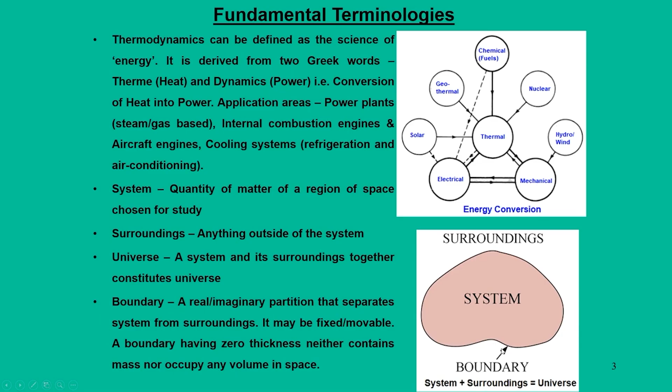System and surroundings constitute the universe. This is the very basic philosophy of thermodynamics, and one can think of this boundary as either a fixed boundary or a moving boundary.

While talking about systems from a thermodynamic viewpoint, a system is treated as either a closed system or an open system. In a closed system, there is a fixed amount of mass concentrated within, and this mass can be compressed or expanded within the system. That means change of state of the mass is allowed within that vicinity, but the system is not allowed to have mass interaction from the outside. So for a closed system, there is no mass interaction, but it has flexibility—it can interact with surroundings by virtue of energy interactions.

When you move on to an open system, often referred to as a control volume, the volume of the system can change because this open system allows mass to come in and go out, and it also allows energy to enter and leave the system. Through this process, open systems allow both mass and energy interactions. In the special case where no mass and energy interactions are possible, we call it an isolated system.

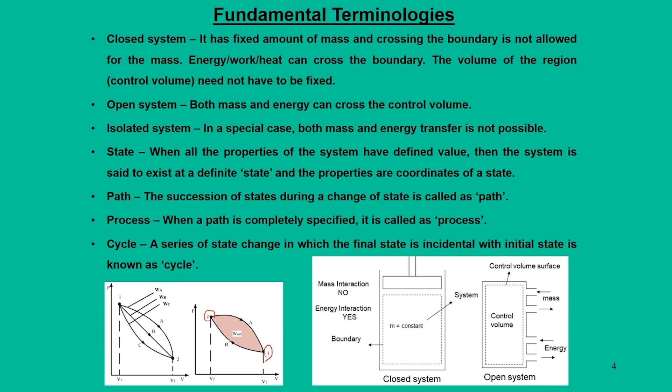In this figure, we define a state of a system at point 1, and it goes to point 2 along path B. However, point 2 comes back to the original state through another process or path, A. So 1, B, 2, A, and back to 1 forms a cycle.

Another kind of study we come across is the quasi-static process. When the coordinates of a system change, we say a change of state happens through a particular process. But if this change of state happens in a very slow manner, we view the system as undergoing a series of changes internally, happening very slowly. As a result, although there is internal change, the external effect due to this change is negligible, because the system is always considered to be in equilibrium with its surroundings at all points. Such a process we define as a quasi-static process.

A quasi-static process occurs through a series of equilibrium states, and although there is a change of state, the surroundings are not affected by this change, because the system and surroundings are always in equilibrium state.

Through a simple figure we can explain a quasi-static process. Here we have a piston cylinder device, and in this piston there is a gas at initial state P1, V1, T1. This initial state is due to a weight kept on the piston, and so we have this system and its boundary.

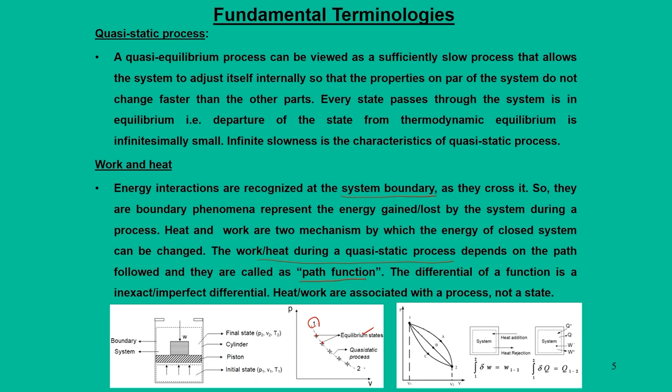Then we will move on to properties, and thermodynamically we view the properties as either intensive or extensive. Every system is defined by its own identity or state, and that state is defined by its properties - pressure, volume, temperature - all are thermodynamic properties, but they are broadly categorized as either intensive or extensive.

Intensive properties are independent of mass and size. For example, temperature, pressure, and density are treated as intensive properties. Then we have extensive properties that depend on the size of the system, that is, mass dependent. For example, mass, volume and energy are treated as mass dependent.

For example, to show which property is intensive and which is extensive, let us take a container or rigid system which has a volume V, temperature T, pressure P, mass m, and contains a gas which has a density rho. Now what we do is make a partition - this is your initial state and we create this partitioned state.

When you make a partition, what may happen? Mass may become half, so if you drop a partition among them, mass we can make half, volume also you can make half, but in both partitions, the gas or fluid will have the same pressure, same temperature and same density. That means pressure, temperature and density do not change whether mass changes. So pressure, temperature, density are mass independent - that is what we call intensive properties, and the others are extensive properties.

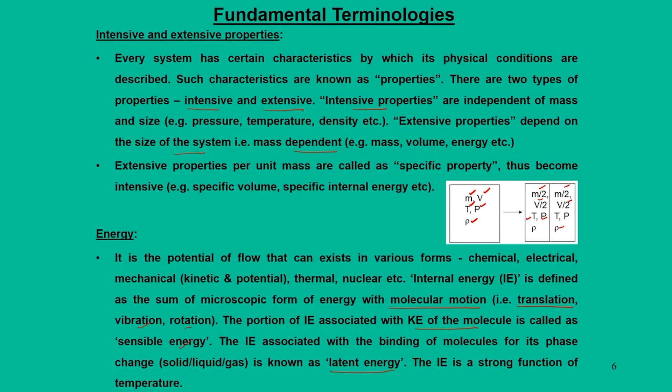When we say internal energy is associated with the kinetic energy of the molecules, we call it sensible energy, and that happens due to change in temperature. When this internal energy is used for binding molecules in its phase, and we want a change of phase, then such energy we call latent energy. However, this internal energy is a strong function of temperature, and that is for pure substance. In our entire course we will talk about internal energy as a function of temperature only.

Then let us review the first law of thermodynamics. It says that energy can be - it is what we call the conservation of energy principle. It says that the energy of a system undergoing a change or process can be increased or decreased by exchange with the surroundings, and it can be converted from one form to another within that system.

So through this process, energy is conserved. There is a possibility of change of energy from one form to another, but the accountability is that the total energy which enters into the system must go out of the system. Energy auditing will tell you that the total accounting of energy that enters and leaves must balance each other. However, the conversion is allowed, but it does not indicate whether the conversion of energy from one form to another takes place completely or is performed perfectly or not.

To define this energy, or to define the first law, the most ideal system we can choose is an open system, because an open system allows both mass and energy interactions, and this energy interaction is possible either by heat or work. Hence we will view this open system as a benchmark to define the first law.

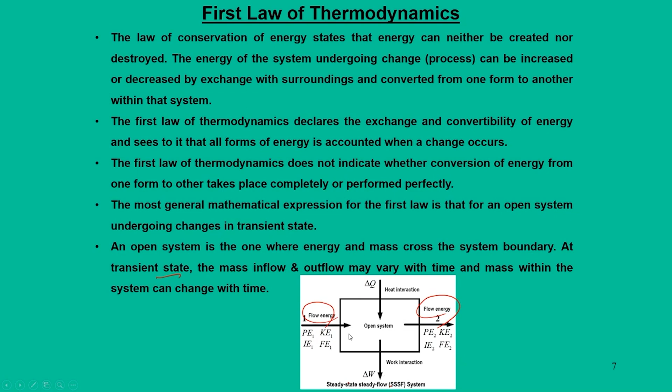Apart from that, the open system also interacts with heat or work. Now, the most ideal way of looking at this change of state is as a completely transient state, where mass inflow and mass outflow can vary with time. But to frame our first law in a precise manner, we will assume it to be a steady state, steady flow system, SSSF system, and for that we need to do energy auditing which takes care of all forms of energy.

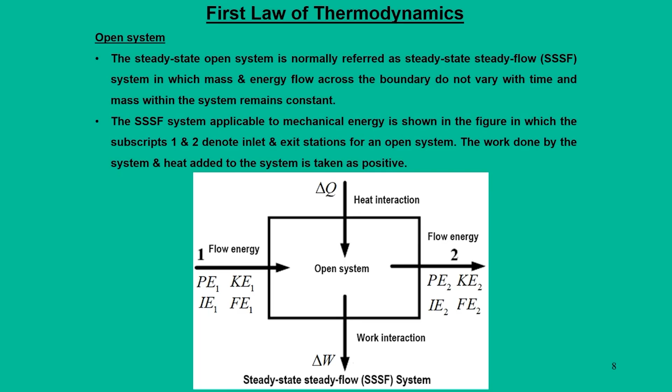So a steady flow system allows heat interactions and work interactions apart from mechanical energy. That mechanical energy comes by virtue of potential and kinetic energies. Now let us do this energy auditing for these open systems.

So in this figure, if you apply the first law, what we see entering the system at state 1 is delta Q through heat interactions. This delta Q is the net heat which gets added to the system, so it is taken as positive. And the net work interaction, which is work done by the system, we interpret as delta W, or steady flow work, which is on the right hand side of these equations.

Apart from that, what enters through state 1 is a combination of PE1, KE1, IE1, and FE1. Similarly, what goes out is PE2, KE2, IE2, and FE2. Now individually, we can interpret potential energy as mg times z, kinetic energy as half mv squared, internal energy as mass times specific internal energy u, and flow work as pressure times specific volume or volume, so it is PV1. So likewise we can interpret the others.

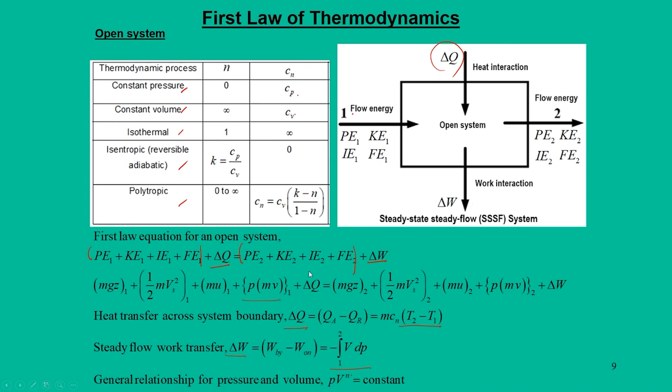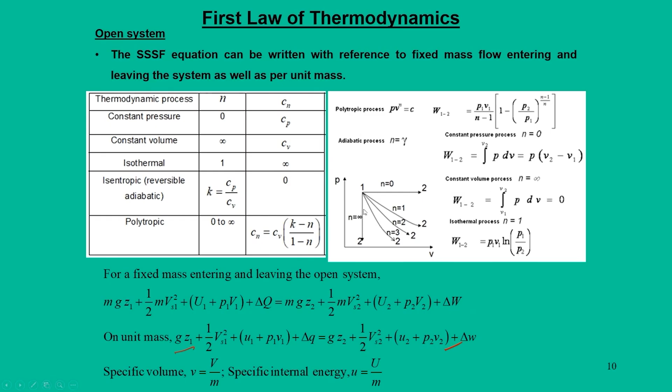Many times we also interpret the steady flow energy equations on a per unit mass basis. So we can define specific volume as total V by m, or specific internal energy as U by m. Accordingly, on a per unit mass basis, if it is a fixed mass entering and leaving the open system, we can simplify these equations. This particular figure also shows, for different values of n, what the PdV work can be defined as.

Another term for open systems that the first law talks about, apart from internal energy, we define the term enthalpy. Enthalpy is nothing but internal energy plus flow energy. So, H is equal to U plus PV. There is also a definition for specific heats, which is a function of internal energy, as a change in the internal energy with respect to temperature.

For gases we can have two specific heats, because we can view this specific heat in two different ways, either at constant volume or at constant pressure. So accordingly, we define specific heats at constant pressure or constant volume. The difference between them is the characteristic gas constant for a given fluid. Then we also have the specific heat ratio K, that is Cp by Cv.

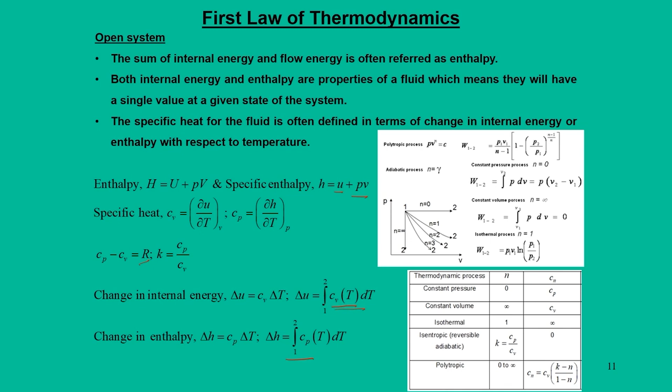Many times we also interpret that if Cv is a function of temperature, it cannot be taken as a constant, so it has to be in the integral form. Similarly for enthalpy as well, Cp can be treated as a function of temperature. So, this is the summary of open systems.

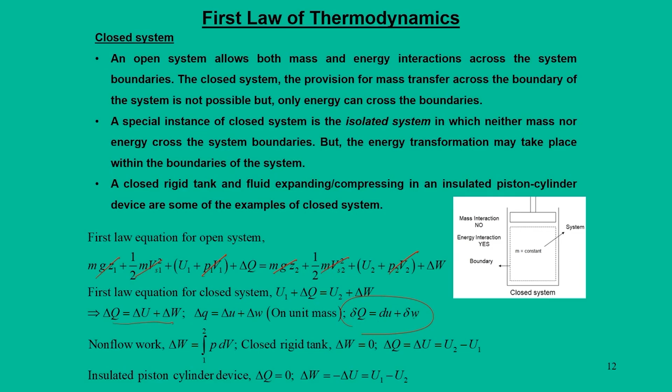So the first law becomes u1 plus delta q is equal to u2 plus delta w, and ultimately we say delta q is equal to delta u plus delta w, and in differential form, dq is equal to du plus dw. Since q is a path function, it is an inexact differential, whereas since u is a property, it is an exact differential. So, this is the first law for closed systems.

Now, already I defined a cycle. Cycle means, in our subsequent lecture we will talk about that if you want to extract energy, convert energy from one form to other, particularly heat to work, you need a working fluid that has to operate in a cyclic manner, and that working fluid has to undergo some change of states, and this change of states is accounted such that it forms a cycle.

For example, this is a particular cycle, and it is nothing but a diesel cycle. The process goes from 1, 2, 3, 4 in a particular fashion, and the same process can be shown on a TS diagram. Through this concept we can say that if you want to extract heat from a fuel, you must use a working fluid that works in a continuous manner such that this working fluid changes its state from 1 to 2 to 3 to 4 to 1, so that it forms a cycle.

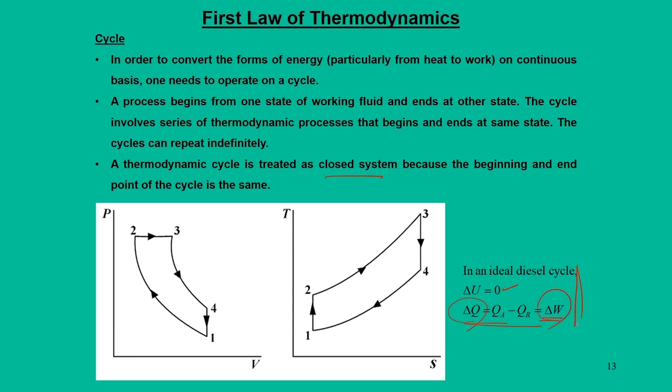For this particular diesel cycle, since the initial state and final state are identical, there is no change in internal energy, but delta q can be equal to delta w, and this can be viewed as a closed system. So energy auditing tells us that the total change in heat interactions also balances to work. So delta q is equal to delta w. This is how the first law applies for a cycle.

Previously, in earlier courses of thermodynamics, we might have known different processes. We are not going deep into all of those things. Rather, I will try to emphasize the different thermodynamic processes, and this particular table talks about the summary sheet for different processes: isothermal, constant pressure, constant volume, reversible adiabatic, polytropic, throttling, which are commonly used in all kinds of thermodynamic devices, and correspondingly their state relationship, how pressure-volume relations are taken into account, and other properties like change of state in terms of internal energy, enthalpy, entropy, non-flow work, flow work, and heat transfer. This is the summary sheet, and the derivations are already there in the basic level thermodynamics course, which we are not going into deep here.

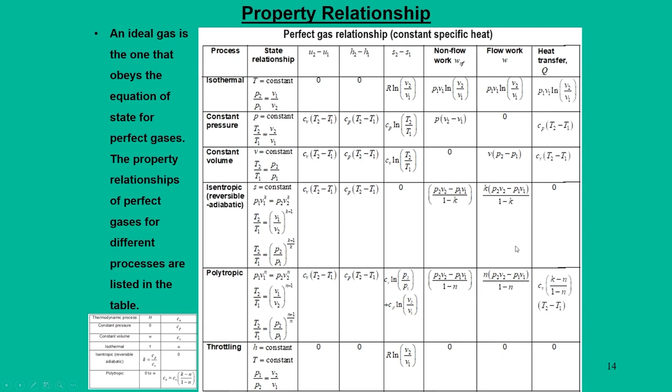Now, another point that I need to emphasize here: many times we will be talking about perfect gas and non-perfect gas.

We all know the equation for an ideal gas, that is PV equals RT or MRT. This ideal gas equation states pressure-volume characteristics where P stands for pressure, V stands for total volume, M stands for mass, R stands for the characteristic gas constant for that gas, and T stands for the absolute temperature. This equation holds good for an ideal gas.

Now, if it is a non-ideal gas, this equation changes by introducing a term called Z, the compressibility factor. That means if it is not a perfect gas, we say it is not an ideal gas because the molecules are close enough to exert forces on each other, such as when the gas is highly compressed, highly cooled, and in critical conditions.

This means there is an intermolecular force that binds the molecules - that is one part. Second, the ideal gas law is violated, but each molecule tries to occupy some space, so the total volume accounted as V is less than expected. For these reasons we have different equations of state, called the van der Waals equation of state.

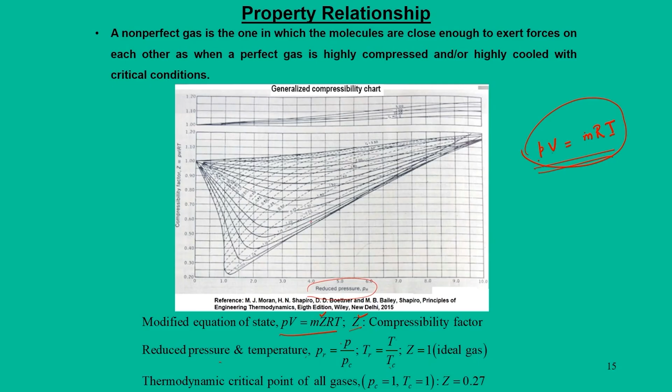What is the significance of these two? If you know Pr and Tr for a given gas, you can easily use this chart to find the deviation or compressibility factor, and this tells you whether the assumption of the ideal gas equation is violated or not. That is the advantage of introducing this compressibility chart. However, unless very accurate information is required, in most cases the validity of the ideal gas assumption is unanimously accepted.

The last segment is to introduce some steady flow devices, governed by the first law of thermodynamics. Steady flow devices operate on steady thermodynamic processes, in which the fluid flows through the control volume steadily. Fluid properties can change from point to point, but at a fixed point they remain the same for the entire process.

In the steady flow device category we have nozzles and diffusers, turbines and compressors, heat exchangers, and throttle valves. A nozzle expands the fluid, increasing velocity at the expense of pressure, and a diffuser does exactly the opposite. In turbines the gas expands, and in compressors the gas is compressed - so a compressor requires work input, but a turbine produces power. Then we have heat exchangers.

A heat exchanger does not produce any power; it mainly deals with the interaction of heat. In a control volume, two fluids can interact in two ways: they can mix in a mixing chamber, where a combined fluid leaves, or they can be passed through two different paths without mixing, only exchanging heat. This second way is what we call a heat exchanger.

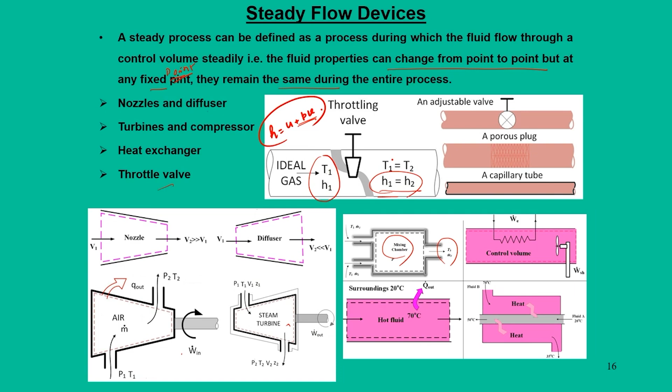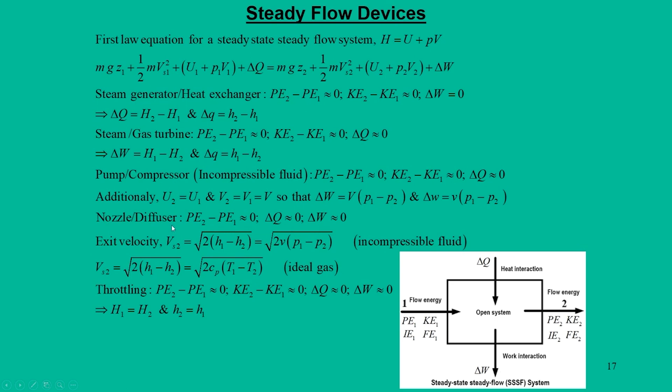Looking at these simple relations, the steady flow energy equations can be framed for steam generators, heat exchangers, steam turbines, compressors, nozzles and diffusers. All these derivations are available in textbooks; this is nothing new, but can be derived based on this figure and these equations. We start with the first law equation for steady flow energy systems. Based on the nature of the device, many terms can be neglected for a particular steady flow device, and accordingly we frame these steady flow energy equations for different components like steam generators, heat exchangers, gas and steam turbines, compressors, nozzles and diffusers, since each device has a specific role to perform.

So this is all about the discussion. With that, let me try to solve some numerical problems which we have covered in this lecture.

In this first problem, I want to demonstrate whether we use the ideal gas equation, which you all know, versus treating the gas as a non-ideal or non-perfect gas. This problem shows we have a rigid tank that stores nitrogen, with a volume of 0.3 meter cube, a pressure P of 70 bar, and T equal to 23 degree centigrade or 296 Kelvin. We need to find the mass by two means: one, assuming a non-perfect gas,

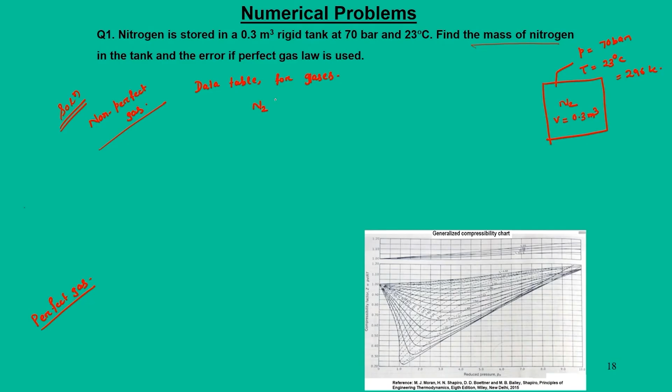and second, if the perfect gas equation is assumed. In other words, if nitrogen is treated as a non-perfect gas, how do you calculate the mass? For that you have to refer to the data table found in any thermodynamics book, for gases or pure gases. For nitrogen, this gives two important values called the critical values.

One is the critical pressure, which we note as 34 bar. The critical temperature for nitrogen is 126.2 Kelvin. More details about these critical conditions will come in the next class, where we deal with pure substances. For now, let's use this critical pressure and critical temperature.

Then we can find the reduced pressure and temperature. Pr equals P by Pc, so this number is 70 by 34, which equals 2.05. And Tr, that is T by Tc, this number is 296 divided by 126.2, which is 2.34. So we have two numbers, Pr and Tr.

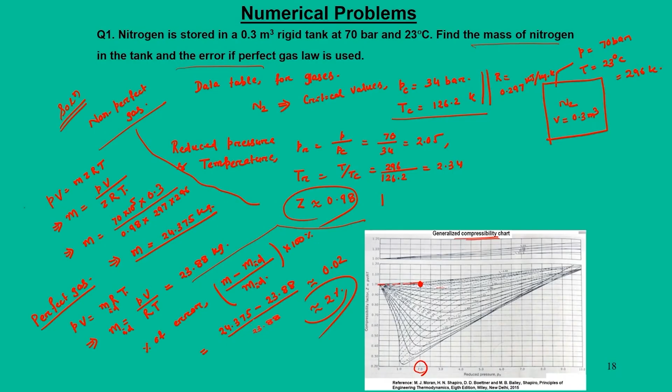This happens to be 24.375 minus 23.88, divided by 23.88. So it is approximately 0.2, or 0.02, or close to 2%. So for this problem, if nitrogen is treated as an ideal gas, we introduce only 2% error.

So the next problem is based on steady flow devices. In this case it is a water heater operating under steady flow conditions. It takes water at certain enthalpy and temperature, and the water is heated with steam, supplied at 105 degree centigrade and 2680 enthalpy, and the mixture leaves at 100 degree centigrade and 420 kilojoule per kg.

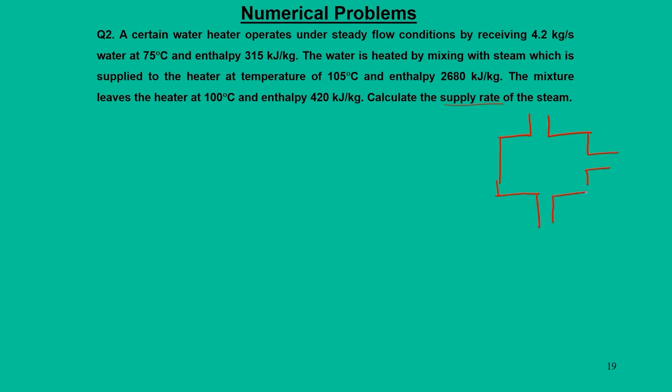We need to find the supply rate of the steam. To do that, recall an open system with two fluids entering and one fluid leaving, so it is two inlets and one outlet. One stream is water, the other is steam, and this is a water heater.

So the conditions of water: mass of water, enthalpy of water; then mass of steam, enthalpy of steam; and we have the mixture, that is mm and hm. There are two equations we can frame for this water heater problem. One is the mass balance: MW plus MS is equal to MM.

Then we have the energy balance. By neglecting all other terms and retaining only the heat terms, we write delta W as 0, delta Q as 0, change in potential energy as 0, and change in kinetic energy as 0. So we can write the steady state, steady flow equation as MW HW plus MS HS is equal to MM HM.

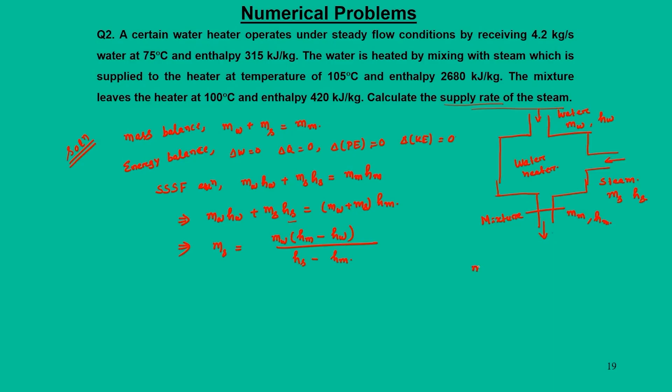The data given here is MW equal to 4.2 kg per second, HW water 315 kilojoule per kg, HS 2680 kilojoule per kg, HM mixture 420 kilojoule per kg. Inserting these values, MS is equal to 4.2 into 420 minus 315, divided by 2680 minus 420.

So MS is equal to 0.195 kg per second, or approximately, since this number is low, we can convert it into kg per hour, which is 703 kg per hour, just by multiplying 3600 to this MS value. So the supply rate of steam is 703 kg per hour.

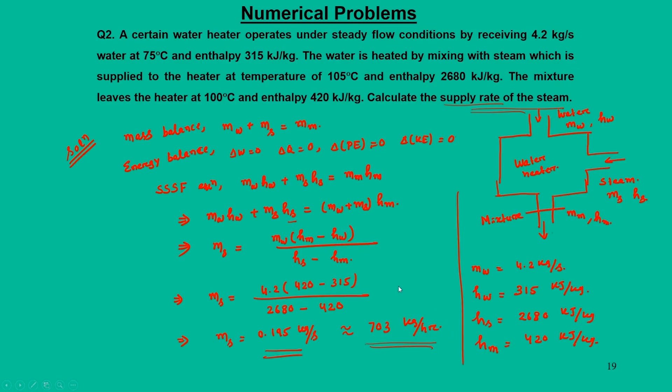So these are the two sample problems for our lecture today. With this, I conclude this lecture. Thank you for your attention.